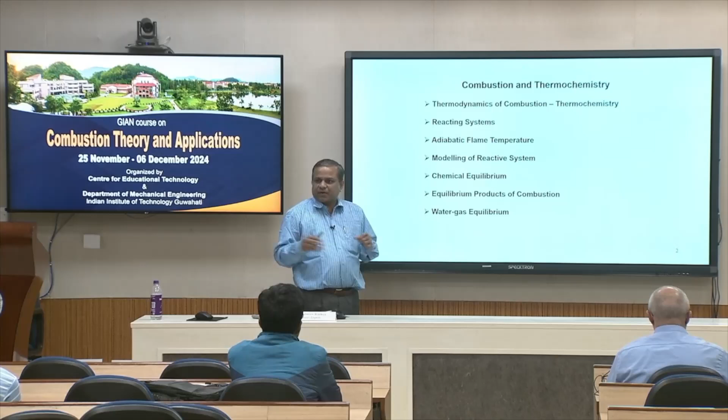Then we will talk about how to model reactive systems. Now, when a reaction happens, it happens in a very short duration, and in this short duration many kinds of elementary reactions take place, but ultimately, when the reaction settles down, we get the products. Under some equilibrium conditions, certain products are formed. Fuel and air, when they get mixed, are supposed to give these products. This situation is called chemical equilibrium. When chemical equilibrium is formed, whatever products finally settle down, we call them equilibrium products of combustion.

There is another concept which we normally use, what is called water gas equilibrium. It has a certain bearing: for any kind of combustion reaction, the final product is CO2 and water. If this happens, then we call this system's concept water gas equilibrium. CO2 and water are in equilibrium after these reactions.

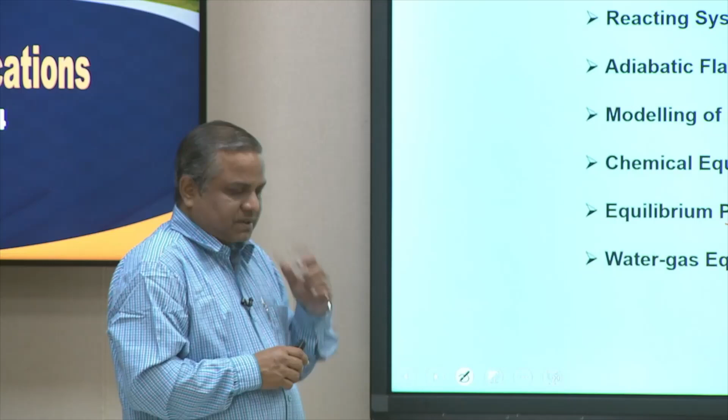Another important aspect of combustion and thermochemistry: the reaction can be exothermic or endothermic. Exothermic means heat is released, endothermic means heat is absorbed. But in combustion reactions, you always expect the reaction to be exothermic. Very rarely do we talk about endothermic, because sometimes some species are formed at very high temperatures, but due to some reason the temperature drops and those species try to settle down by absorbing some heat within the system. In those cases the system may be considered partially endothermic. Okay. So, those are some of the concepts that we are going to discuss in today's lecture.

So, let me brief about this, that when you bring thermodynamics into combustion, the synonymous word we use is thermochemistry, and combustion is nothing new. It is a very old concept. We can see that the combustion concept was existing since the existence of the sun, because that is the oldest mode of combustion, which was happening billions of years ago and will be happening in future. But still we do not know what is the source of energy.

So, obviously when you say combustion, we have fuel and air. Since we are getting energy from the sun, we can imagine there are plenty of fuels available in the sun, and we are getting that in terms of solar energy. So, what I am trying to say is the concept is nothing new, it was a very old concept.

Combustion came to human civilization when we started burning wood, when people saw fires in the jungles because of a variety of reasons. So, those things were started with, and wood is a solid fuel, and from that starting point combustion spread to a variety of platforms: petroleum fuels, diesel fuels and all. So, with that evolution we can say what the outreach of combustion was, starting from 100 years ago till date.

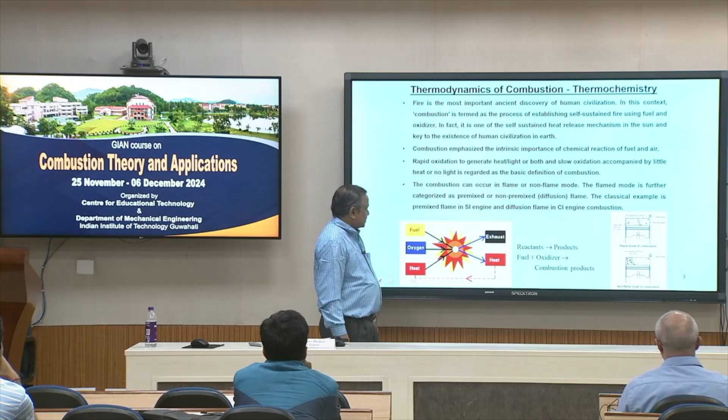So basically, at the atmospheric level, we take advantage of air to get oxygen, and when fuel and air are mixed together with the addition of heat, a tremendous amount of heat gets released after the combustion process is over, and we get some exhaust products. So the identity of fuel and oxygen gets lost. So we say that reactants give products, and these reactants are in the form of fuel and oxidizer. Here the oxidizer is air as a whole, and we get the combustion products.

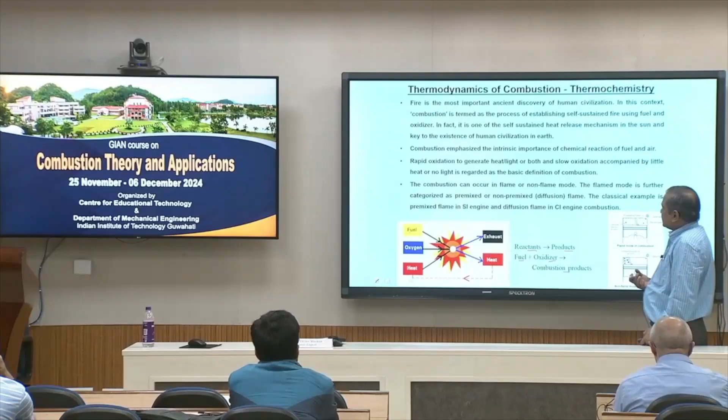Now when you say combustion, what really happens there? How does it initiate? It is initiated through a flame or non-flame mode. Flame mode means that when you create a spark or ignite, as maybe in our last lecture Professor Marcus showed, when you ignite, there is a flame front that starts moving. So that is called a flame. So we introduce a term called a flame, which forms instantaneously when we ignite the fuel and air mixture,

and that flame travels in that domain. So if you take a typical IC engine combustion in an SI engine, it's a flame mode. We initially have an unburnt fuel air mixture here, and we create a spark and the flame gets generated. At the initial level, the entire domain is filled with fuel and air mixture. When you create a spark, a flame front gets generated. That is how we view or model the combustion phenomenon. This flame front tries to move, and when it moves by its own strength, it compresses the unburnt fuel and air mixture, and through this compression all subsequent fuel gets ignited.

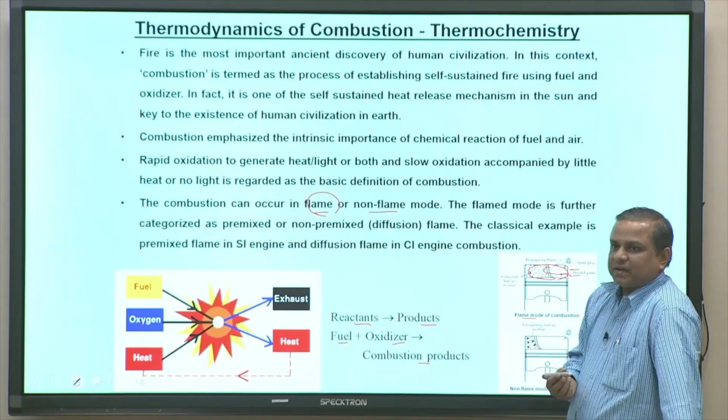Now initially it's a flame, and when the intensity of this flame gets increased and increased, we can characterize it as a flame front traveling at subsonic or supersonic speed. That way we can quantify it as a detonation wave generated through this combustion. But initially the starting point of viewing combustion initiation is through flame. Another way is the non-flame mode.

Actually, this flame mode of combustion is typically a concept called pre-mixed. Pre-mixed means air and fuel are mixed before it gets combusted. So sometimes we call this a pre-mixed flame.

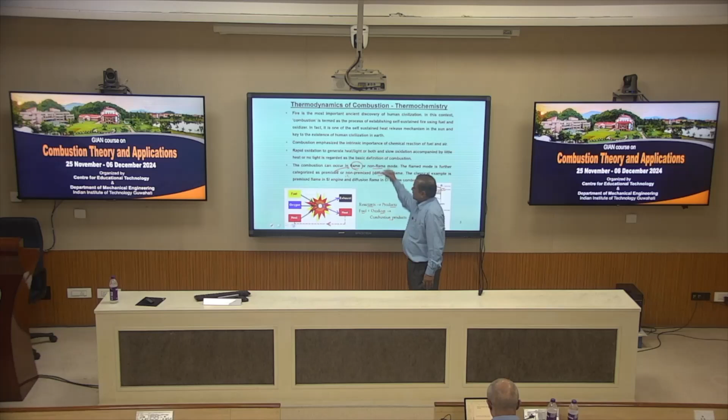The non-flame mode type of combustion and diffusion flame are actually linked in a different way. Many people call it a diffusion flame; some people also call it a non-premixed flame. The concept here is that in a non-premixed flame, the spark plug is replaced with a fuel injector.

When you have this fuel injector, it means that in this piston cylinder device, initially the air is only compressed, and into this compressed air we inject the fuel. So the fuel sees an enhanced pressure and temperature environment, and thereby the fuel gets auto-ignited.

When we say auto-ignited, it does not necessarily have a particular location. In flame mode, the flame front gets initiated wherever you put a spark, and it starts moving. But here, as you might have seen for diesel engines, fuel injectors can be put at various locations. Essentially, we are creating multiple flames at a time, and they settle down together. So it cannot be categorized specifically as flame mode combustion.

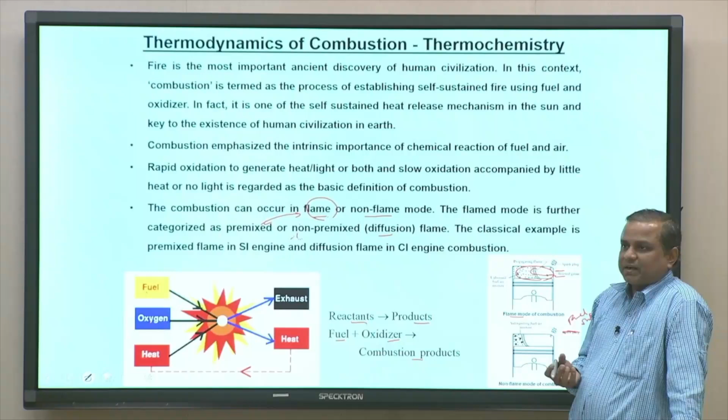That's the reason we call this non-flame mode combustion, because flames can be formed at many locations simultaneously, because the fuel gets auto-ignited. The injected fuel droplets get auto-ignited when they find a suitable ratio of fuel and air, which we call the equivalence ratio. When those numbers are at par, the fuel gets auto-ignited. So this is sometimes called a non-premixed flame.

In many cases it is also interpreted as a diffusion flame, because initially it is a non-premixed flame, and this non-premixed flame also ignites the subsequent layers of fuel-air mixture. So the flame front cannot be seen as a single front; that is the reason the fuel-air mixture gets diffused among themselves.

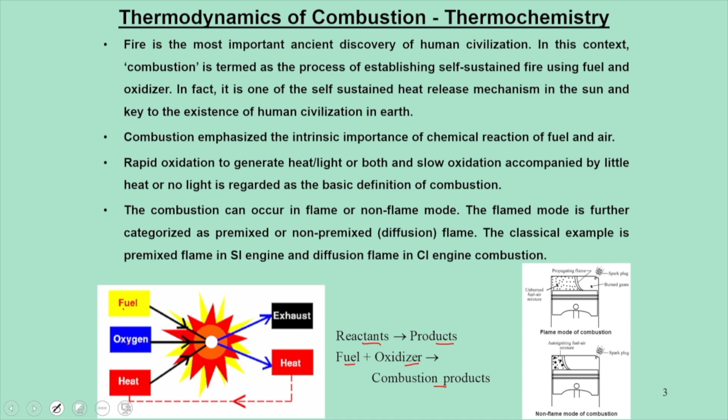The system as a whole has certain internal energy, but during combustion, this internal energy is associated with three major factors. One is the translational or kinetic energy of the species which are constituents of fuel and air. Then we have vibrational and rotational kinetic energy. So we are breaking the fuel down at the atomic as well as molecular level. That is the reason internal energy is interpreted in this manner.

Another aspect is that when we talk about combustion, we normally refer to hydrocarbons, fossil fuel based combustion, which involves chemical reactions, dissociation, and their thermal analysis. Now moving further, with respect to thermochemistry, we are also going to get acquainted with some terms: reactants, products and stoichiometric coefficients. I mentioned earlier that the reactants give products.

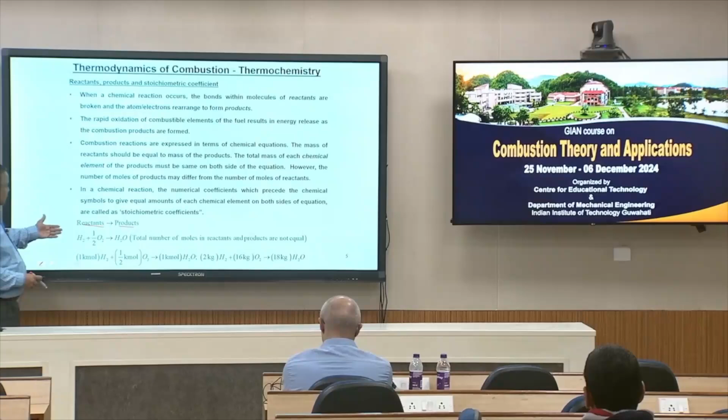To introduce stoichiometric combustion, when you write balanced chemical equations, we introduce terms like, in this case, H2 plus half O2 gives H2O. The number of atoms on the left hand side and right hand side match, but the total number of moles of reactants and products here are not equal, because here it is 1 mole, here half mole, and here 1 mole. So although the number of atoms is the same,

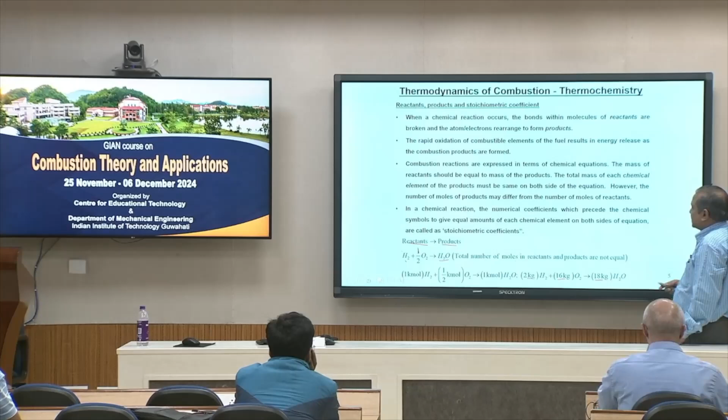when you talk in terms of moles, we write this equation in terms of their molecular weight. So 2 kg of hydrogen and 16 kg of oxygen will give 18 kg of water. Here the masses get balanced, and these masses are typically represented in terms of moles. So mole is the term we look at in a combustion reaction. Additionally, we have to introduce stoichiometric coefficients for a balanced chemical equation.

Then we will move to some concepts of fuel. Fuels are typically fossil fuels, and they mainly contain carbon, hydrogen and sulfur, and mostly the carbon constituent in the fuel is the major source of heat generation.

During what we call a complete reaction, carbon reacts completely with air to form carbon dioxide, hydrogen gives water, and sulfur gives sulfur dioxide. Now, why are these constituents formed?

Because when the reaction is done, after the reaction is over, the temperature always shoots up. When it shoots up, the carbon is no longer in a position to remain as its original identity. It tries to combine with oxygen to form carbon dioxide. Hydrogen has to mix with oxygen to give water, and sulfur will have to give sulfur dioxide.

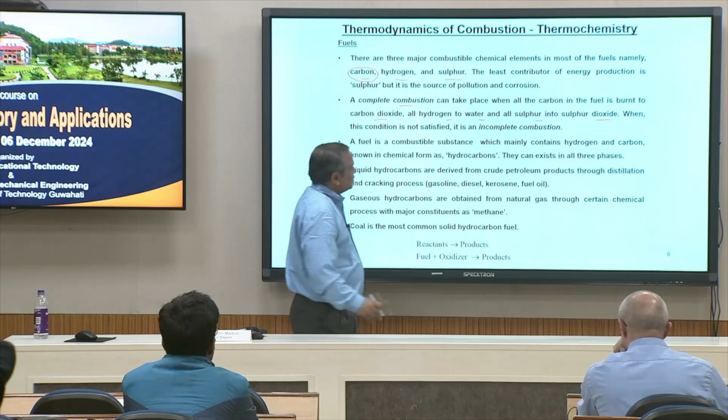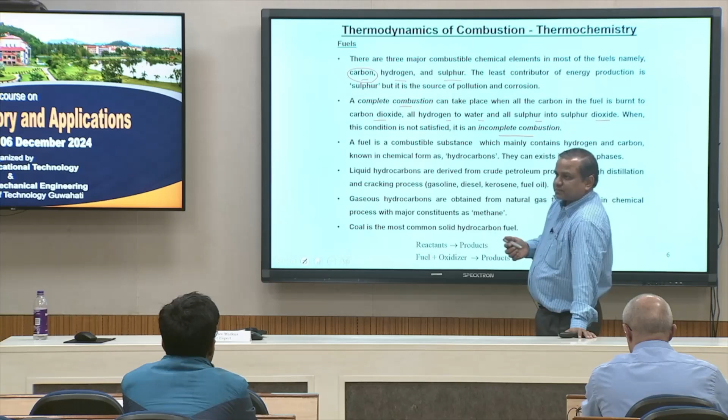But at the end of the day, if you don't get this, then we call this an incomplete combustion. The main culprits for this are: if you do not get carbon dioxide, if you do not get water, and if you do not get sulfur dioxide from sulfur. So when we don't have carbon dioxide, it will remain as CO. Why will it be there? Because the reaction environment is not convenient or ambient enough to form carbon dioxide.

So this is how we should feel the reaction should go about. Coming back to fuel, I mentioned earlier it consists of hydrocarbons, and we can call them solid fuel, liquid fuel, and gaseous fuel.

Solid fuels, we started with wood, but it can also go further—if you are going to concentrate the energy within a small density environment, then you have to bring it into solid form. Firecrackers are in solid form. All kinds of solid propellants are also solid fuels.

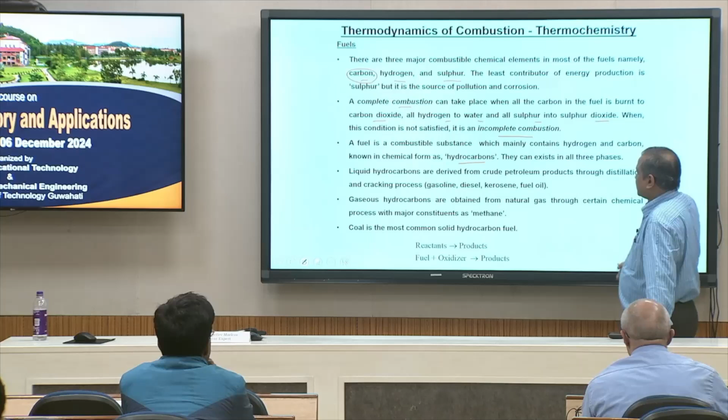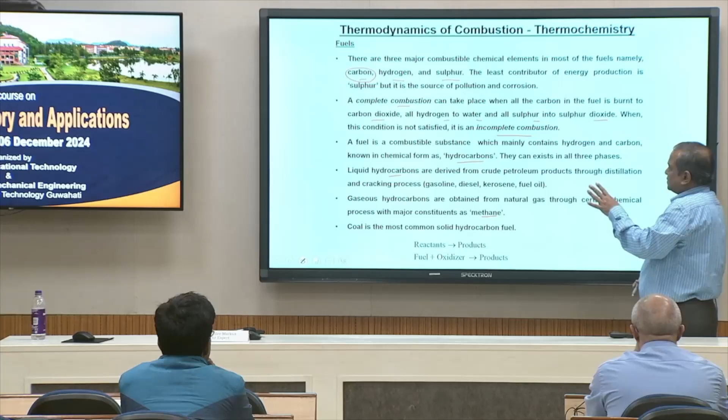For liquids, we have gasoline, diesel, kerosene, fuel oil—all these fall under liquid fuels, and we call them liquid hydrocarbons. Again, when we say gaseous hydrocarbons, the major constituent we find is methane. So what I am trying to say is that it is essentially hydrocarbons which are available in different phases.

So initially, when you look at fuel and oxidizer systems, if you take methane as fuel and it reacts with oxygen, it gives CO2 and water. But since in actual reactions we are getting oxygen from air, instead of writing that equation simply, we write it as O2 plus 3.76 N2. Why does that number come? Because of this ratio.

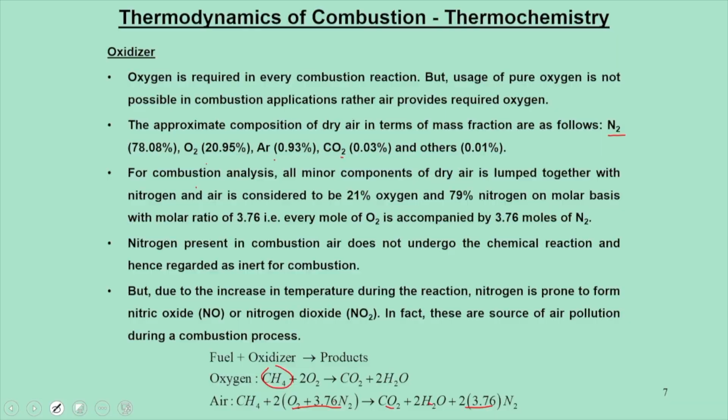So ideally speaking, they should give CO2, water, and nitrogen should not react—nitrogen comes out as it is. This is how the complete combustion reaction should look like. But in reality, this normally doesn't happen.

This is possible only when this equation is balanced, and for this balanced equation we use stoichiometric coefficients. But if the reaction doesn't happen in this manner, which means the composition or the stoichiometric coefficients of fuel and air do not match, then we will end up having different components.

We may not form CO2, we may not form water—then what else will form? In those cases, we end up forming NO, NO2, because the N2, which has to go out as is, due to the elevated temperature tries to recombine with oxygen to form these kinds of constituents, and they are actually the culprits for air pollution.

There is some logic here: when you use the concept of IC engines, the frequent term is air-fuel ratio. But when you enter gas turbine combustion, people use fuel-air ratio. The interpretation for both is the same, but there's a typical requirement for gas turbine combustion, because those fuels are very costly.

When fuels are very costly, people rightly try to find out, instead of air-fuel, they call it fuel-air, because they want to know the exact quantity of fuel that is getting utilized, or what is the exact quantity of fuel which is not utilized. So in gas turbine combustion the fuel-air ratio becomes frequent, even in rocket combustion as well, though there they use solid fuel.

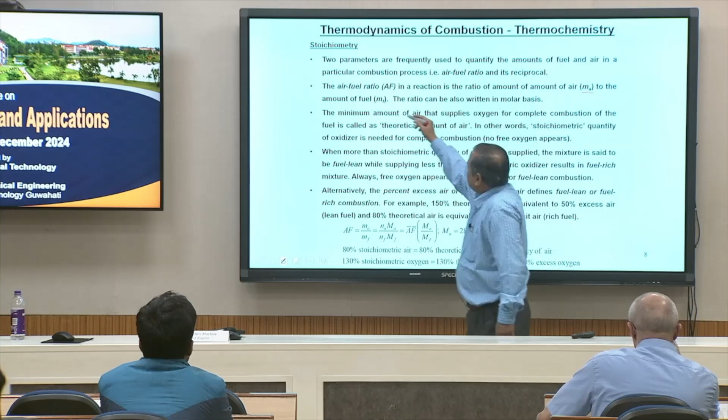So that way, air-fuel ratio and fuel-air ratio terminologies are the same, but interpretations are different. In one case we say air-fuel ratio with respect to mass of air to mass of fuel; in the other case we say fuel-air ratio with respect to fuel to air, mf by ma.

Then there is a term called theoretical amount of air. For a reaction to happen, oxygen plus nitrogen constitute air. To ignite a certain quantity of fuel, we require an exact quantity of air. That air we call theoretical amount of air, and that theoretical amount of air we call stoichiometric quantity.

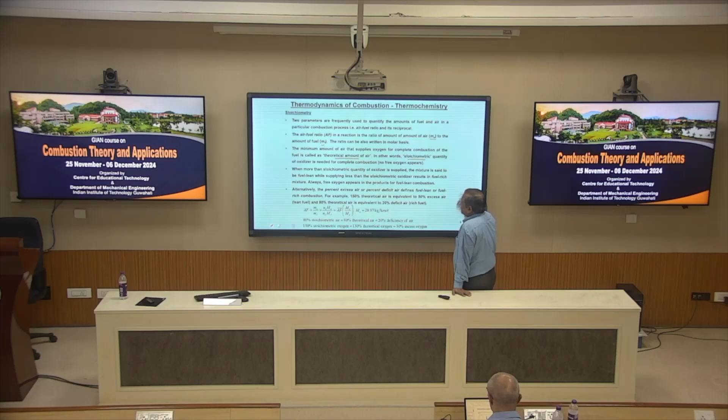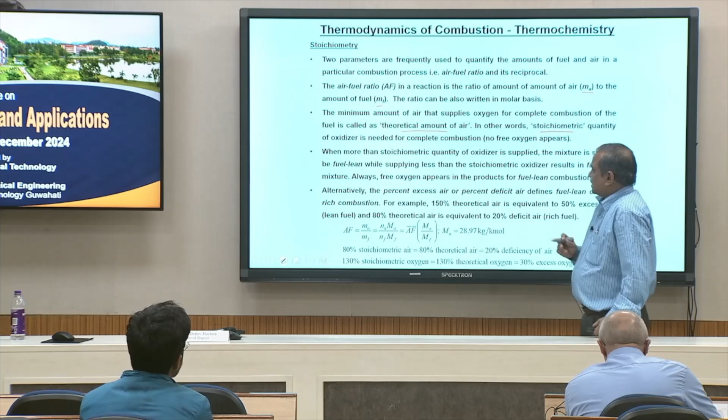Using this stoichiometric air, if your combustion process does not use the exact quantity of theoretical air, then the mixture is treated as either lean or rich. The word lean means, with respect to fuel, that fuel is less and air is more, and vice versa for rich. So fuel lean or fuel rich are the two terminologies we will be using along with this stoichiometric value.

Another way of interpretation is percentage of excess air. If it is theoretical air plus percentage of excess air, it defines fuel lean combustion; percentage of deficit air defines fuel rich combustion. For example, 150% theoretical air is equivalent to 50% excess air, which is lean fuel; 80% of theoretical air is equivalent to 20% deficit air, which is fuel rich.

All this air fuel ratio or fuel air ratio we write mathematically. Let us say air fuel ratio is Ma by Mf, and this Ma we can bring to molecular weight and number of moles. Then we find the number Na by Nf, which by definition we call the molar air fuel ratio. So that way we normally interpret our analysis, either in mole form or mass form.

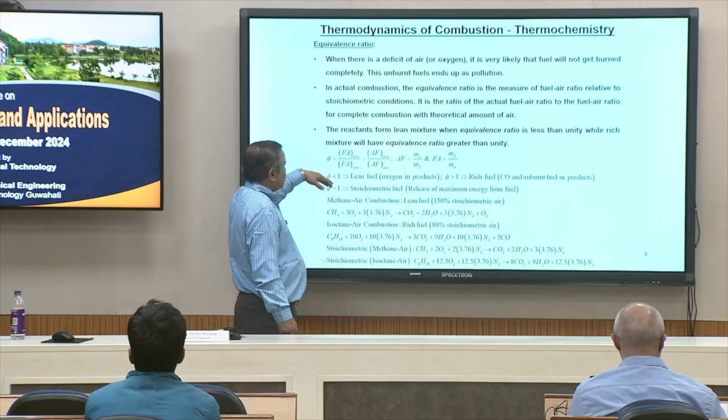When the reactants are either lean or rich, we define a term called equivalence ratio phi, based on the ratio of the actual fuel air ratio to the stoichiometric value. In reality it can be fuel lean or fuel rich, but the actual stoichiometric case is based on getting the exact quantity of theoretical air. So if it is fuel lean, phi is less than 1; when stoichiometric, phi equals 1; and phi is greater than 1 when it is fuel rich.

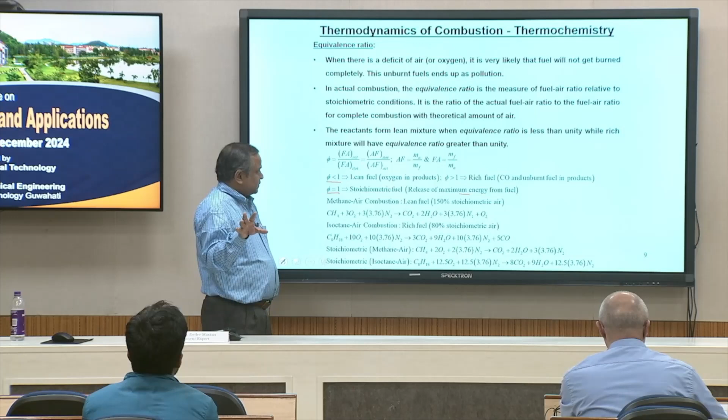The summary is that with fuel lean conditions we get oxygen in the products. With fuel rich conditions we get CO and unburnt carbon or unburnt fuel in the products. And when you have stoichiometric conditions, we get the maximum energy, which relates to finding the adiabatic flame temperature during combustion. These are some class examples of methane air combustion for rich and lean fuel.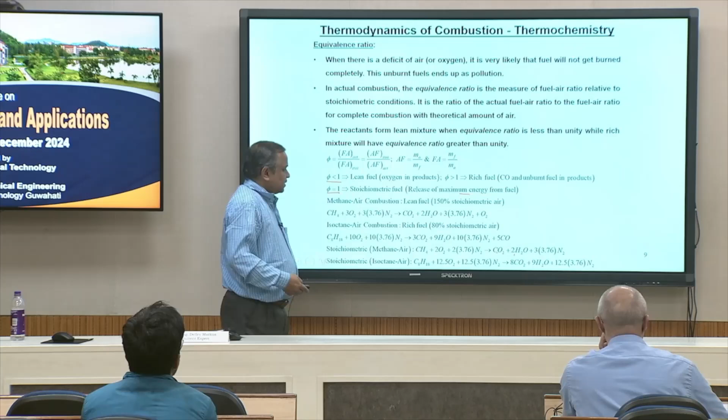Then we have these products of combustion. For a methane air combustion, we get CO2 and water, and N2 remains as it is. What we see is that in the products of combustion we get water, and when we say it is water, the analysis or interpretation is a little different.

One approach is to take the products of combustion as a whole with CO2 and N2 without considering water; that is also a possibility. The other way is that you take the water into account. So those cases we call dry product analysis or wet product analysis.

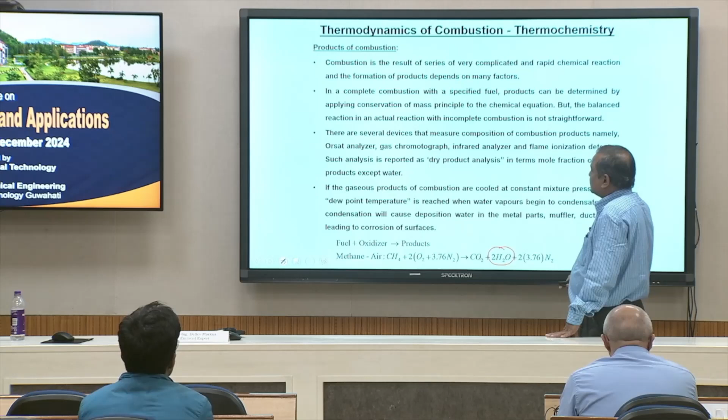In some situations, the gaseous products of combustion in the mixture are cooled to a dew point temperature. This happens because when the products of combustion find a cooling environment, they try to condense with deposition of water. Then we say they reach their dew point temperature, so condensation gets initiated.

We will try to give the introduction to the standard reference conditions used when dealing with combustion mechanisms. The standard reference state uses either reference condition of atmospheric pressure and reference temperature normally set at this number. Why is this required?

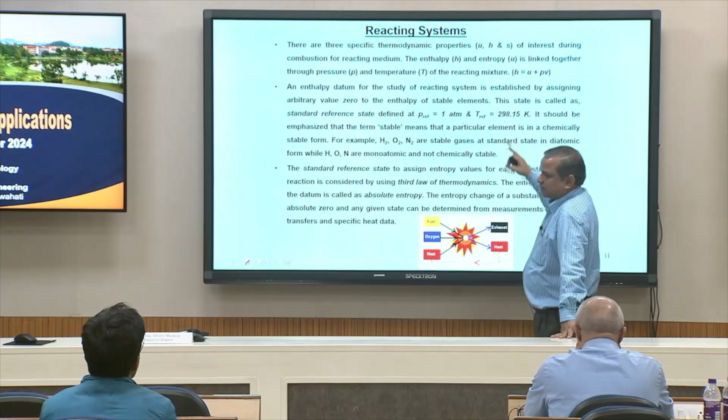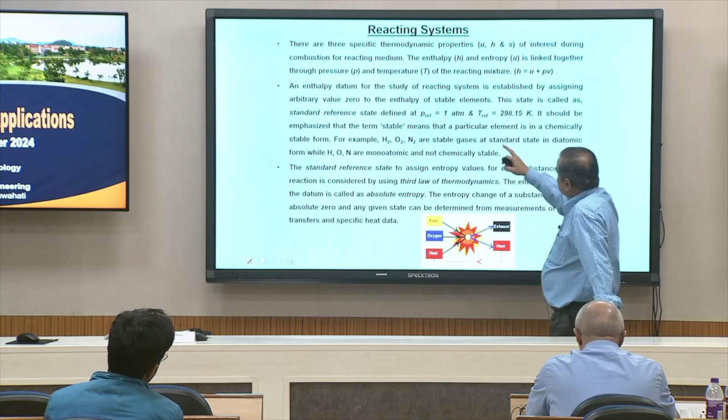Because in our thermodynamic analysis calculations, we require the formation of the products with respect to some references. Those formations of products are taken at these references, and all the data available in the books are with respect to the standard reference state, mainly required for computation of absolute entropy.

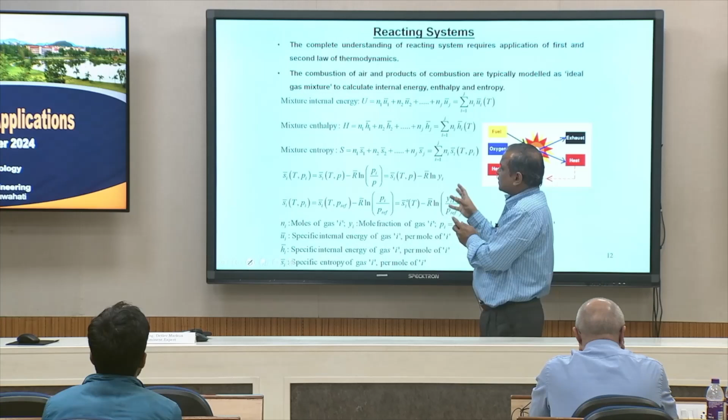So here are these equations I showed in the last class, where we try to define a mixture, and here we are saying that a mixture is not a mixture, it is reactants and products. Those reactants and products we quantify with their parameters: internal energy, enthalpy, entropy for each constituent, to make a balanced equation.

So what we see here is that while computing entropy and all these equations, we use molar form, number of moles for each of the species or constituents. When some species is formed, how it is formed has to be dealt with, because when you do the entropy calculation, it talks about the difference between initial state and final state.

Now the initial state and final state, when you analyze for a mixture, it is easy because they do not react. Now when the reaction happens, the identity of reactants is lost. So people try to interpret how to find out this change in entropy.

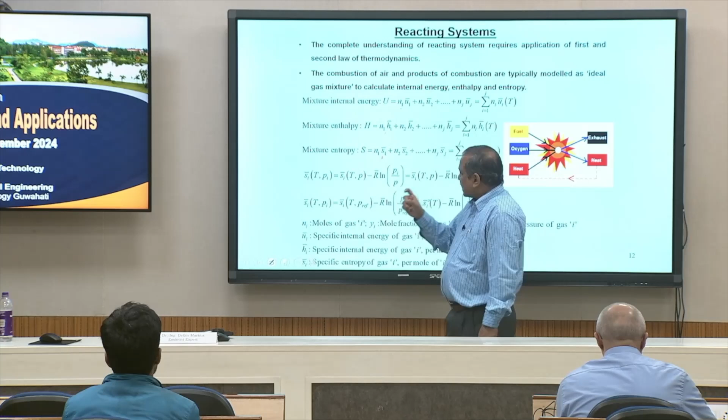So they started with the concept that we have to take some reference value, P reference and T reference, as that reference condition. You take that reference value as identity for calculation of entropy, and from there you calculate the entropy change. So the analysis gets simplified, because if you look at classical thermodynamic equations, delta S is equal to S2 minus S1, this is entropy.

You do not really bother about this term, we really bother about this R bar ln Pi by P reference. But here we have to bring absolute entropy into discussion.

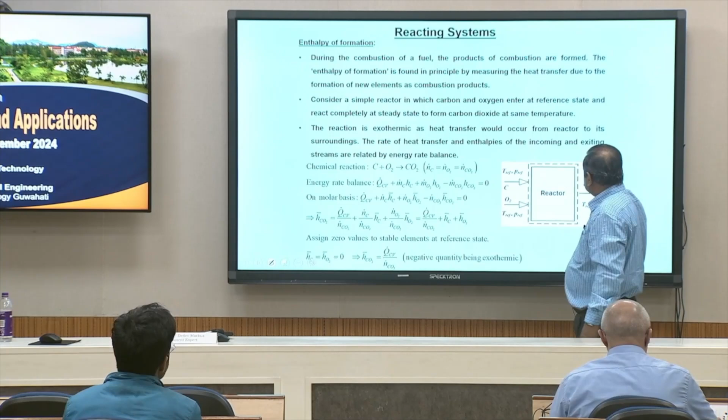This is enthalpy of formation. So another term: how do you get the enthalpy of formation? While defining this term, we are actually using the first law analysis for reactants and products. So something like here we say we have a reactor and some species that enter, and while going out we get different things, but the entire reaction takes place at these reference conditions.

This means that if you say formation of C at this reference and formation of CO2 at this reference, those reference conditions match between your inlet condition and outlet conditions. When they match, we frame, first we find out the chemical reactions, do their molar analysis, and then find out the difference between the enthalpy of formation, defined by this term H bar CO2 through these equations.

So ultimately for any reaction, enthalpy of formation of CO2, in this case, is nothing but heat transfer divided by number of moles, which means this heat transfer can be negative or positive depending on exothermic or endothermic reaction. That way we say it is the enthalpy of formation for that species.

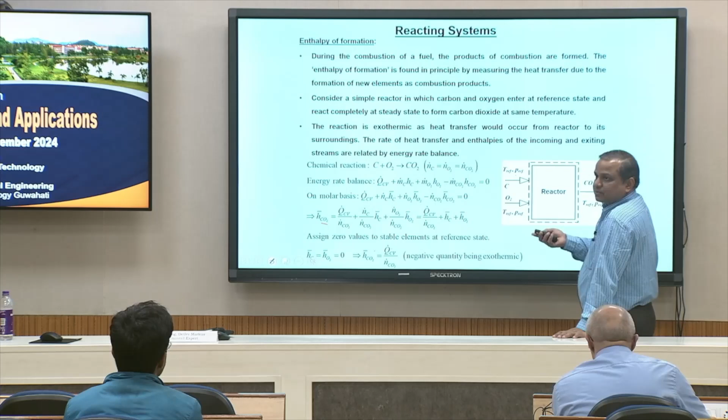We say NO2 is formed, CO2 is formed with respect to C and O2. Then with respect to those enthalpies of formation, because the word enthalpy of formation is with respect to species, but as a whole, when you take the fuel as a whole, we interpret it this way: we first think about what is the enthalpy of combustion.

So enthalpy of formation is with respect to the species which is formed. Enthalpy of combustion is with respect to reactants and products. When you say reactants and products, using the first law, you try to find out what is the energy content in the reactants and what is the energy content in the products. The difference between them gives the enthalpy of combustion.

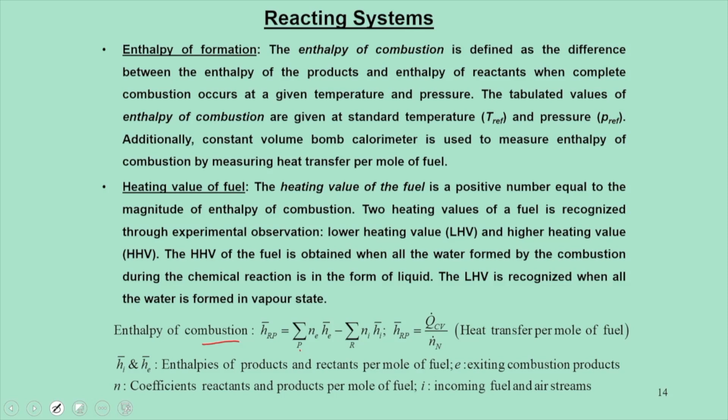This enthalpy of combustion is linked to the heating value of fuel. How do you interpret this? Enthalpy of combustion is with respect to chemistry, but with respect to fuel we call it the heating value. The heating value of the fuel is interpreted in two ways: one is the higher heating value, the other is the lower heating value.

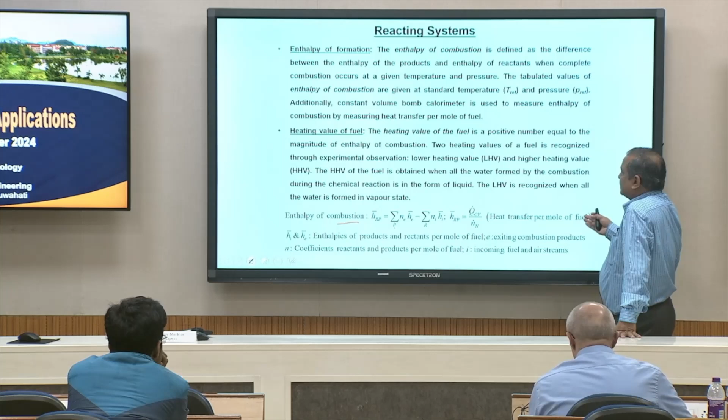Now, when the analysis is done keeping water in the combustion products, in one case we call this a higher heating value. When you say higher heating value, it is obtained when all water formed by the combustion products is in the liquid form. So, that way the consideration of water formation is taken into account during the combustion process. Now, when we say lower heating value, it is recognized when all water formed is in the vapor state.

So, that means in one case we say the formation of products without formation of water, and in the other case we say the formation of products when water is formed or condensation takes place. That means the products are cooled below their dew point temperature.

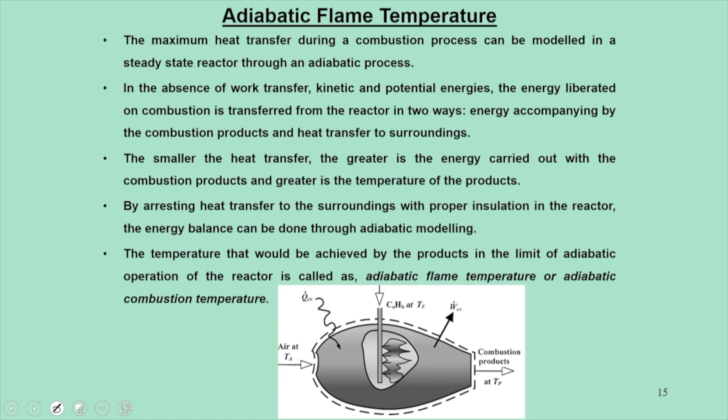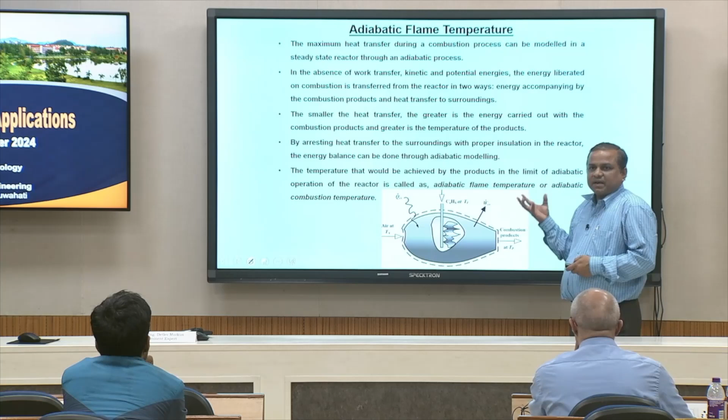Then I mentioned earlier that when reaction happens with some fuel and air, if you enclose that complete environment, then we get a case where the entire energy gets contained within that domain. Now, when that energy gets contained in the domain, the maximum possible temperature that can be raised through this process we call the adiabatic flame temperature. The word adiabatic is just a concept to calculate the maximum temperature during a combustion process. Using our governing equations, one can calculate the adiabatic flame temperature.

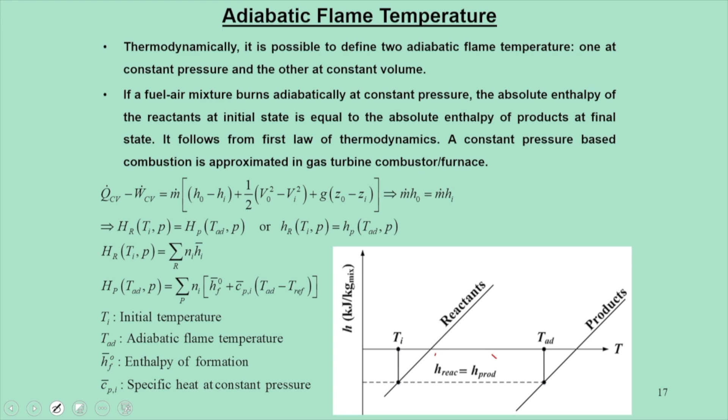Now, while calculating the adiabatic flame temperature, we interpret graphically in this manner, that the entire energy of reactants gets transferred to products. So, when you plot the enthalpy versus temperature curve for all reactants and all products, they go in this manner. Initially the reaction starts here at one point. Slowly, when the reaction happens, the number of moles of reactants comes down, and products formation goes up.

So, the temperature on this axis keeps rising, and at one particular time the reactants are completely burnt to form the products, and we do not allow that heat to go out of that domain or reactor. So, those enthalpies are balanced. In those cases, whatever temperature we reach is called the adiabatic flame temperature. Initially we start with Ti and finally we arrive at this point, the maximum temperature. We analyze the adiabatic flame temperature in two ways: one at constant pressure, the other at constant volume.

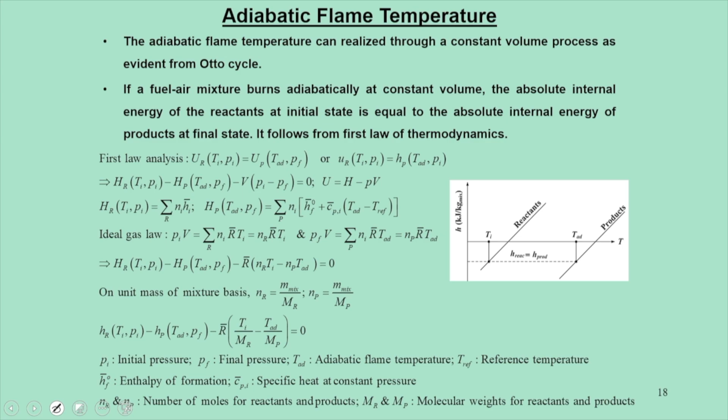I mentioned our thermodynamic equation from the first law. If the first law is to be satisfied, we can say reactants and products are equal, because the internal energy is a function of temperature. So, from the first law we start with internal energy for reactants and say that they match. While calculating that internal energy, initially they are at initial Pi and Ti, and when final products are formed, they are at the adiabatic flame temperature and final pressure. When this equation matches, we can calculate these two values, one at constant volume, the other at constant pressure.

Okay, and this internal energy can be represented in terms of enthalpy as well, because U is equal to H minus PV. So, interpreting adiabatic flame temperature can happen in two ways, one at constant volume, the other at constant pressure. Based on this, we have two equations. One equation is this, in terms of enthalpy, where the adiabatic flame temperature is calculated at constant pressure.

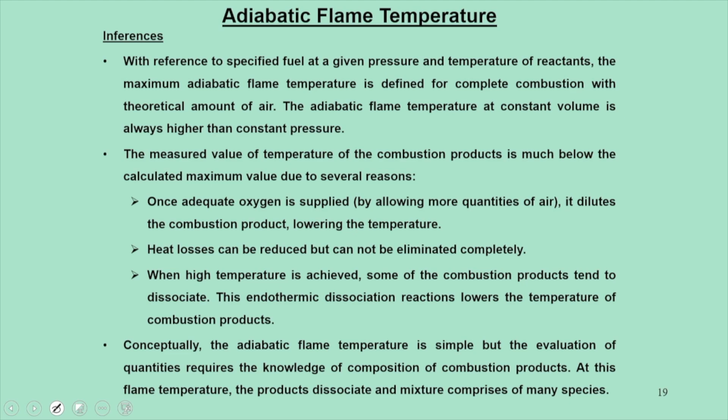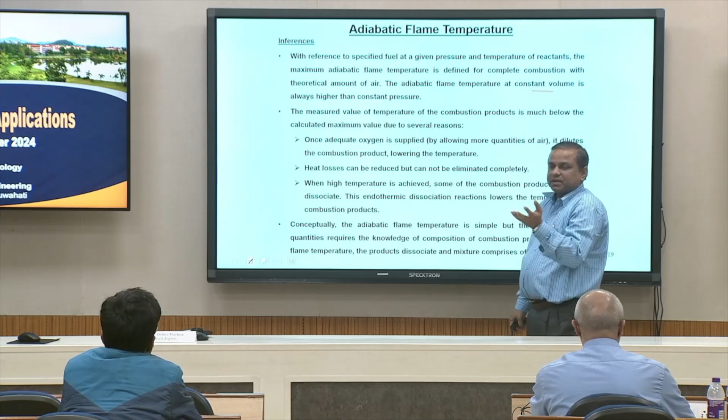Now, having said this, from adiabatic flame temperature calculation at constant pressure and constant volume, one can find some important inferences. During a combustion process, the adiabatic flame temperature gives the maximum possible temperature, and if you calculate it at constant volume, it is always higher than at constant pressure. This has similar logic to the analysis of the Otto cycle and diesel cycle in IC engines: one is constant volume combustion, the other is constant pressure combustion. So, these are some of the inferences we get.

Then there is a concept of absolute entropy. This part I have already explained, how you get it for a mixture by considering the reference point of pressure and temperature.

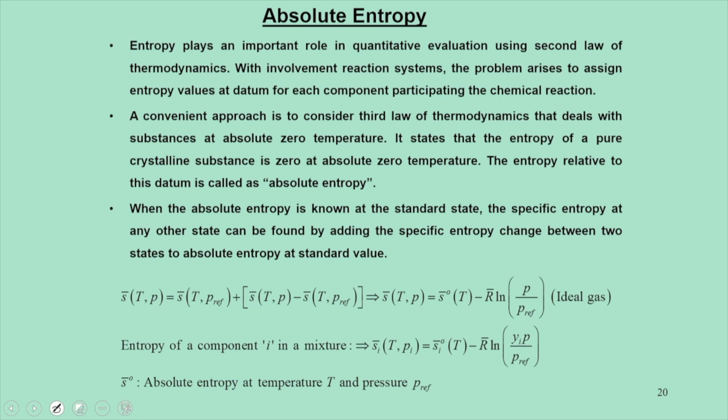Now, coming back to modeling of reacting systems, there are two approaches. One is a control volume modeling, other is a constant pressure modeling. So, in this control volume modeling, we take care about main chemical reactions, how it happens, and this is a simple generic form of chemical reactions for hydrocarbons, where we say these subscripts of carbon and hydrogen in a general form A and B, and through this equation, putting A and B in some manner, we can frame real combustion equations.

So, while doing this, one can think of a control volume based modeling, which allows heat transfer into the systems, because through this process we are igniting. Other way is that fuel and air enter a reacting domain. At the end of the day, we have some fuel sitting in here, air enters, when the heat is added we get the combustion products. So, this approach is a control volume based modeling.

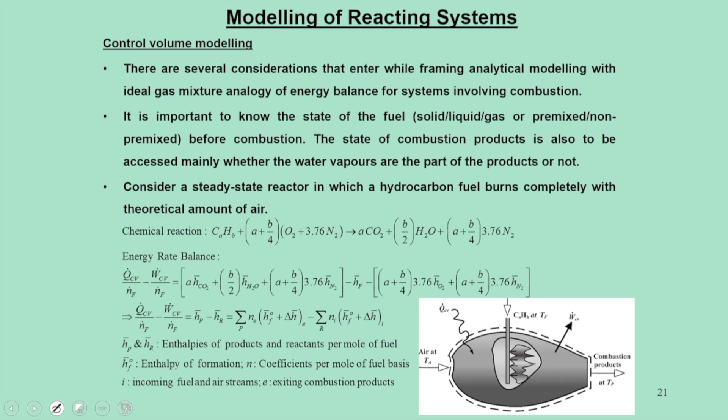And in a closed system modeling, normally we start with this kind of constant volume based modeling. For a closed system, we get our analysis through this constant volume modeling by using the advantage of interpreting internal energy in terms of enthalpy. So, we start with this equation, but somewhere this U value is interpreted as H minus PV. PV is nothing but your RT. These are the equations which are available in the books as well as in the slides. One can interpret in this manner.

Then we have to deal with the entropy balance again for open systems, and subsequently it can be interpreted for the closed system as well. And why I am trying to link is that all these equations which were given in our last lecture were used to derive this form, and here we are not going into the derivations, rather the end use of these equations can be directly interpreted for modeling of any kind of combustion system.

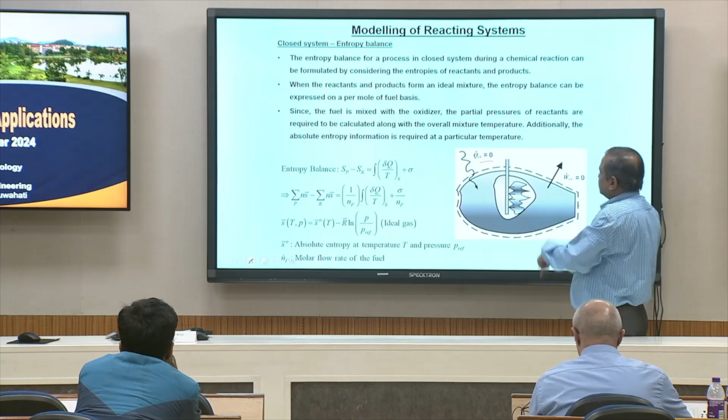Moving further, it is a closed system entropy balance. So, for that we need to recall the entropy equations from thermodynamics, assuming that the reaction is going to happen in a closed system with Q, no heat additions. Okay. So, we have to do this analysis in that manner.

And coming back to the chemical equilibrium part, when the reaction happens, when you have an ideal combustion, we have CO2, water, O2 and N2, but when we do not have those things, we have intermediate products like OH, CO, H, N, NO. These are actually dissociated species, and they try to see another environment to form CO2. If they do not see it, they remain as they are. So, if these are there, that means equilibrium has not happened.

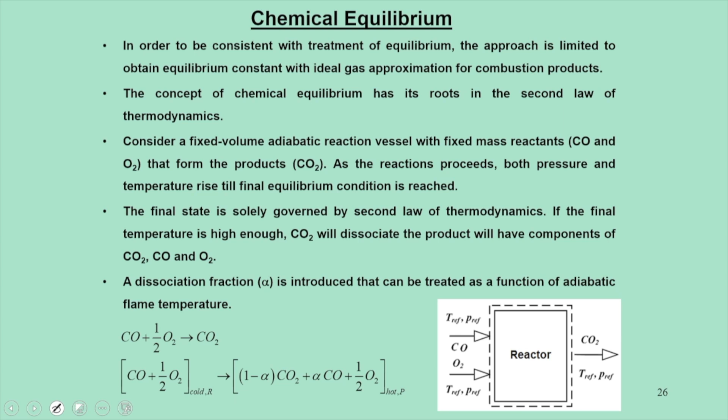Now, moving further, this is a classical example of a chemical equilibrium situation: when you actually view a reaction between CO and O2, it has to give CO2. But the formation of this CO2, what actually initiated this reaction? So, initially we write this equation in this manner, with the case that CO and O2 do not come together all of a sudden. So, when you see this equation, it is an equilibrium equation.

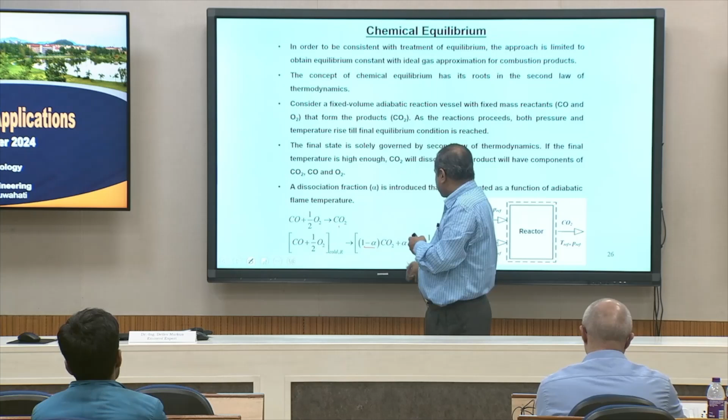Had this equation been non-equilibrium, at any given instantaneous time, we introduce a term: 1 minus alpha, alpha, and so on. So, when alpha is 0, there is no formation of CO. So, this is how you introduce these equations separately in the modeling for this analysis, and that alpha we call the dissociation fraction.

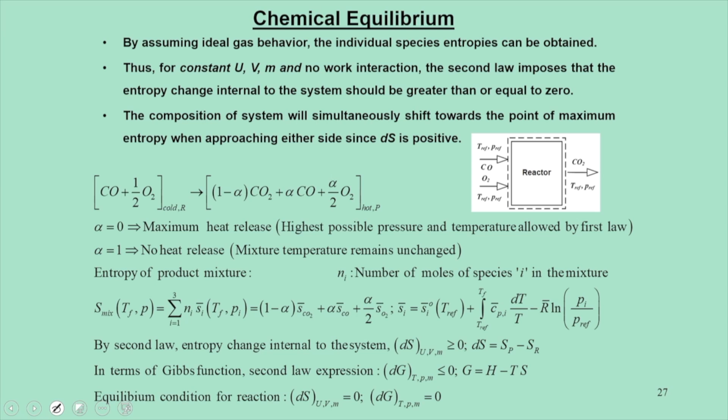This is again the same case: when alpha is 0, it means maximum heat release. When alpha is 1, there is no heat release. There is some significance of interpreting the equation in this manner, because when combustion modeling is done in software or on your own, you have to write the equation in this manner, putting its end conditions.

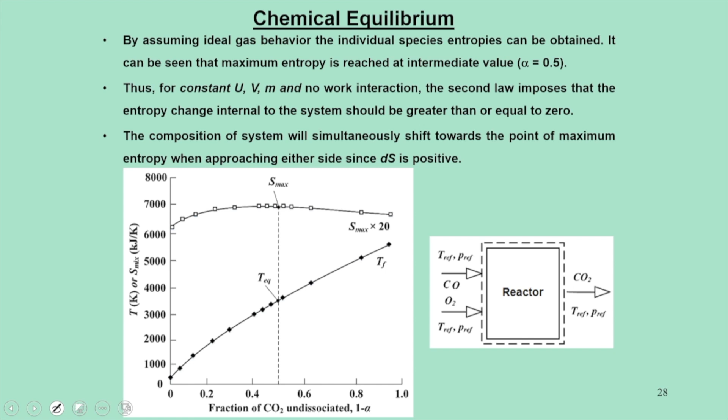Okay, so this is a case where we try to interpret a chemical equilibrium situation for a simple reaction system from CO and O2, which means that when the reaction proceeds, we can see how the fraction of CO2 gets dissociated, that means how this parameter 1 minus alpha changes during a reaction.

Now, when you say it is a chemical equilibrium situation, it means that at that point of time entropy, because entropy drives the reaction, the reaction proceeds in the direction of entropy. Simultaneously, we calculate the temperature as well as entropy.

How do you calculate? I have told you, the reactants and products you have to take as different entities, each term you have to calculate, and for each case you have to do the energy balance through this process, and we can say that entropy always increases in the direction of reaction. So, this curve we get side by side. When the reaction proceeds, temperature also increases because this dissociation fraction gets changed. So, this curve also keeps on increasing.

At what particular time we reach, we have this final temperature, and this final temperature, if the walls are adiabatic, can be interpreted as adiabatic flame temperature. Now coming back, when the equation settles down, that means when equilibrium is achieved, which means that reaction cannot proceed further, you have achieved the equilibrium temperature. So the point at which we have maximum entropy, if you drop a vertical, then it will cut this curve and this will give you the equilibrium temperature.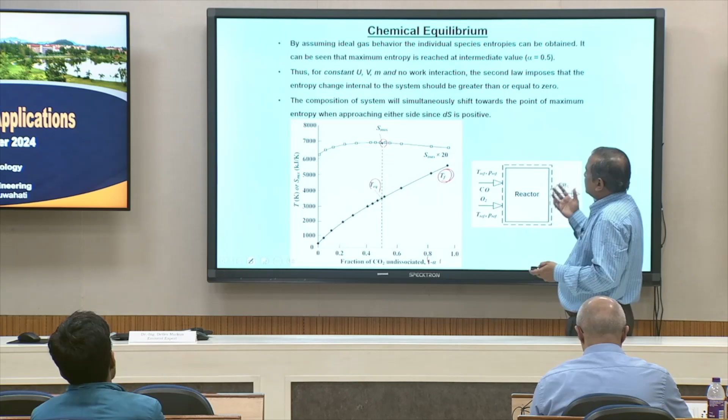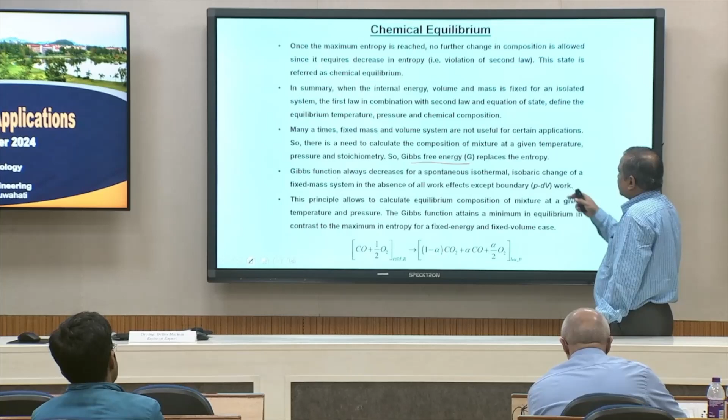So this kind of graphical analysis was mainly used when we don't have any other softwares or modeling approach. So this I have already explained. Additionally, I forgot to mention another term, the Gibbs free energy, or normally we say Gibbs function. The Gibbs function plays a vital role during reactions because entropy is one parameter. Gibbs function gives a different approach which considers temperature and pressure as well simultaneously for the analysis of the combustion process.

So something on this I already told for equilibrium products of combustion. In equilibrium products of combustion, for a propane air mixture, one classical example, the intermediate species are different, like OH, NO, and when you take this mixture globally, when equilibrium is achieved, we get CO2 and water. This is a classical curve that talks about equilibrium products of combustion for a propane air mixture. The significance of the curve is that in a single graphical representation, we can talk about mole fractions, maximum temperature, and the range of equivalence ratio in which the reaction is going to happen.

So if you see here, for a propane air mixture, ideally at equivalence ratio 1, you will reach this adiabatic flame temperature, but in reality that normally doesn't happen. It happens somewhere at phi equal to 1.05. These numbers we get from a realistic experiment, and corresponding to this we get the flame temperature as 2278 Kelvin. So for all IC engine applications, whether you do constant volume analysis or constant pressure analysis, your adiabatic flame temperature falls in this range. When you go to gas turbine combustion, these numbers will be different.

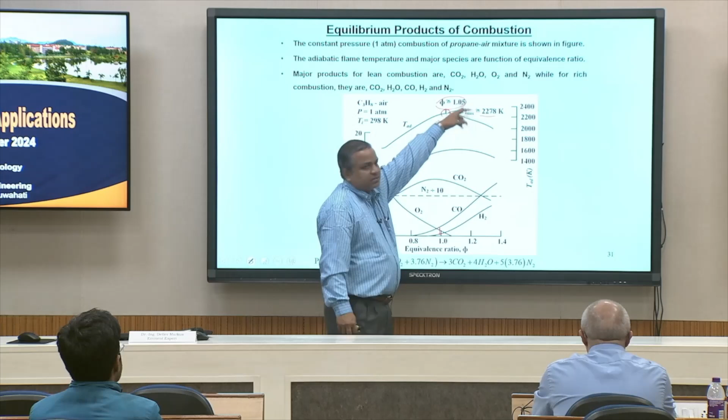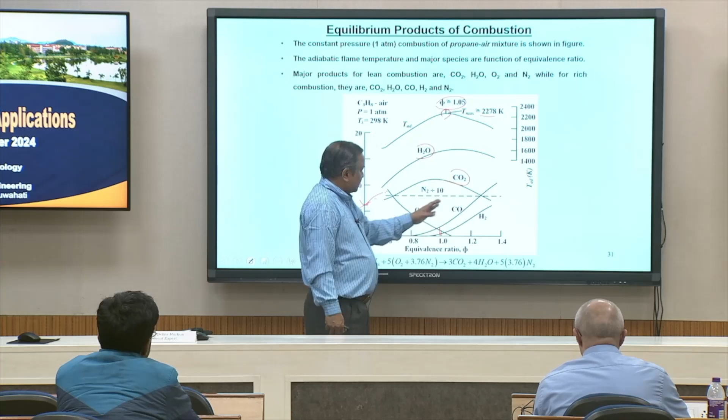Coming back to the formation of the products, when you have equilibrium based combustion, we have CO2 and water. As you see, when your equivalence ratio is increasing, CO2 is also increasing, then it falls down because the concentration or mole fraction falls down, and similarly for these. But this is what you see as a final entity. Before H2O and CO2 form, CO formation would have already started. Hydrogen H2 would have reacted with oxygen. These are some of the intermediate reactions that build up during the initial phase of reaction. Finally, it settles down. But what we see globally is this curve as a chemical equilibrium equation.

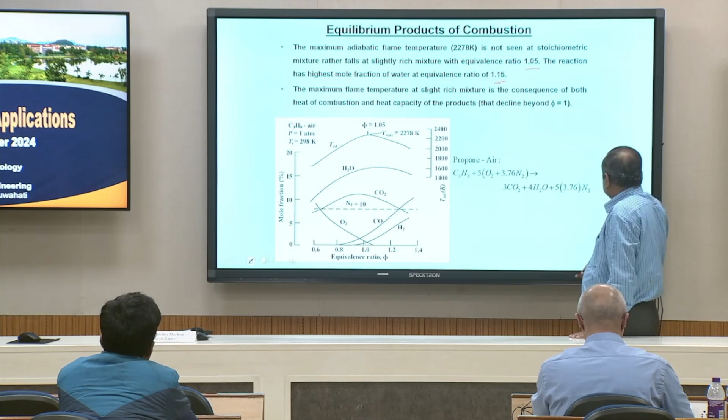This is a similar curve. Here also I mentioned adiabatic flame temperature, and one point is that 1.05 gives you the maximum temperature, but the highest mole fraction of water occurs at equivalence ratio of 1.15, which means that at equivalence ratio of 1.15, it is expected that we can get maximum mole fraction of water. These are in continuation with that. There is nothing new, I have already explained.

And finally, products of combustion: this is a complete picture that talks about all intermediate species that are formed during the lean phase and rich phase. This curve shows how intermediate species like OH, NO, H, CO started at this point, and when the reaction proceeds, NO formation starts, and simultaneously OH and CO formation would have started. So all the curves are plotted together, which means this particular graphical representation talks about species evolution during combustion reactions.

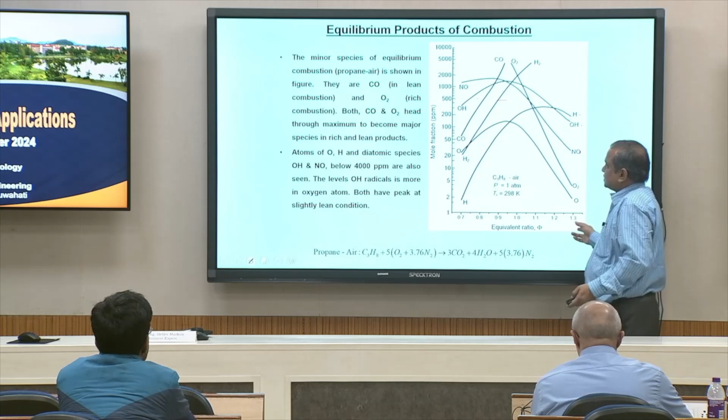So this is nothing new here. And finally, lastly, I will just talk about a water gas equilibrium case. Normally when you have end products of CO, which is completely undesirable, many industries talk about how to reduce this CO level. They consider water-gas shift reactions, like they create an environment in the final product domain so that when there is a formation of CO and it sees enough water, it proceeds to formation of CO2.

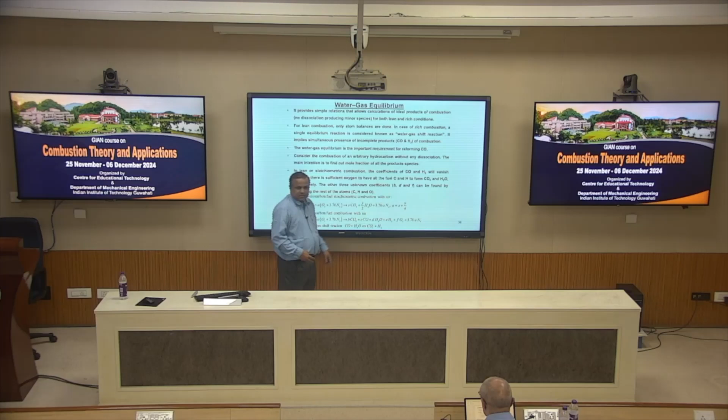So they create a typical environment at the product level, so that we can shift the propagation of CO to CO2. So this is what we call water-gas shift reactions, and most industries use this concept to reduce the level of CO, which is mainly the culprit for pollution.

So already it is time, maybe we can continue after this, or I will continue in the second half from there, because I have some more slides to show. Or maybe a few minutes if it is there. So, last point I am coming back.

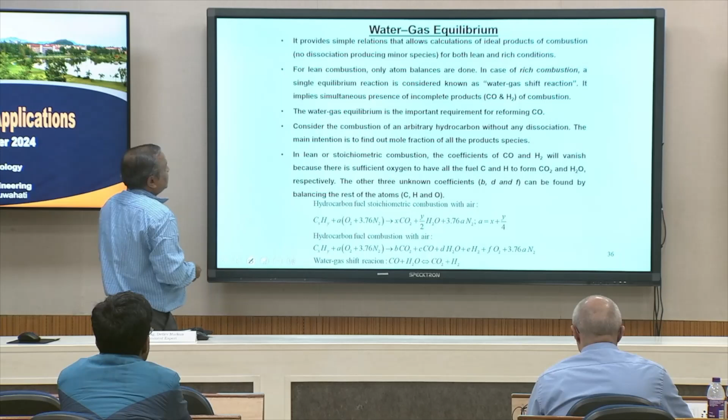I mentioned these water shift reactions. While dealing with water shift reactions, another important concept is that we find the equilibrium constant, because when you analyze the hydrocarbon equations, with fuel and air taken with respect to oxygen and nitrogen, we arrive at these particular equations when such a reaction happens in a situation that

we have formation of CO, oxygen, H2, H2O, CO2, which means these equations are modeled as if a reaction happens in a generic manner, and all the products are trying to form simultaneously. Then how do you evaluate those stoichiometric coefficient values? For that reason, we introduce a term Kp, which is called the equilibrium constant. This equilibrium constant we normally find with respect to ratios of various species that are formed.

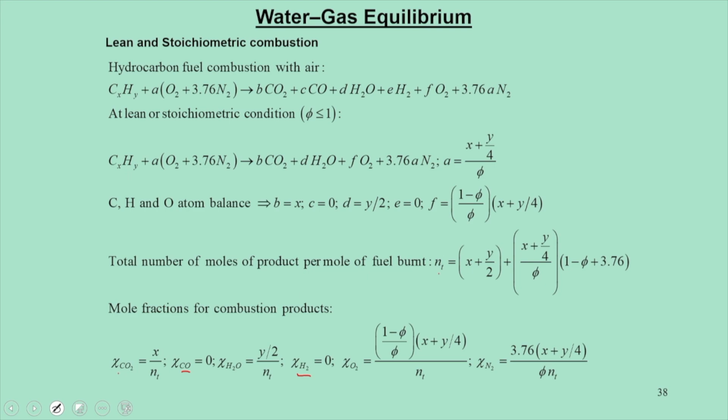As I explained, when the reaction is lean or stoichiometric, we have these products, CO2 and H2O. But when you have rich combustion, the fuel is not getting sufficient air to combust properly. In those cases the reactions have to be modeled in a similar manner. By balancing C, H and O atoms, we get the number of equations equal to the number of unknowns, through the introduction of the equilibrium constant Kp, which is evaluated based on the partial pressures of each constituent.

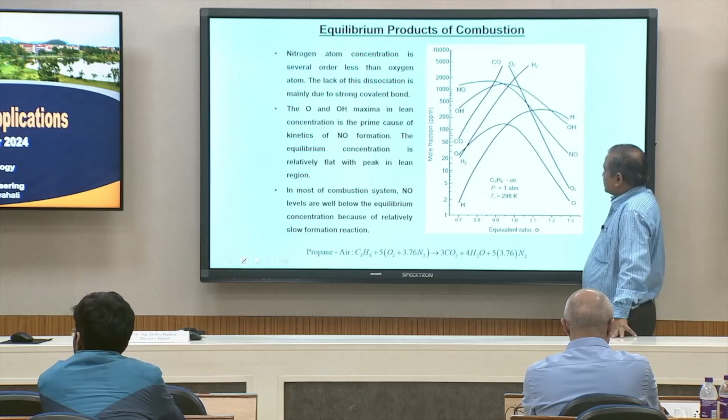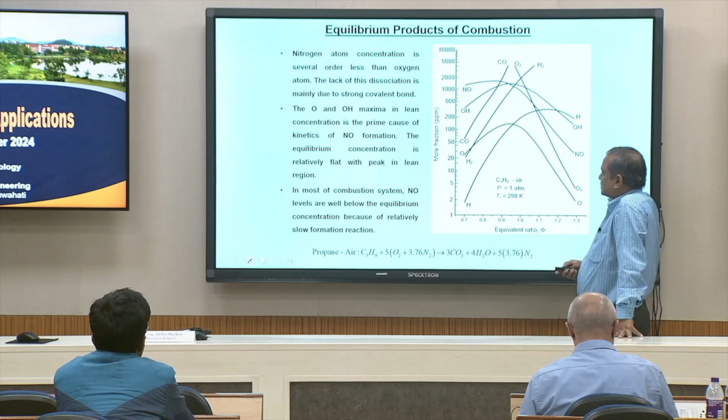So thereby we get a set of equations, and through that set of equations we get this kind of curves. What I am trying to say is that when you generate these curves, in the background we are using all these equations, which give you a graphical representation of the variety of species formed during the evolution of a chemical reaction. So this is all I am trying to say in this lecture.

There are some sample problems in this lecture that can be used to understand what has been covered. At the end, I will just emphasize: although you see these equations, unless you try them on your own, you will not get a feel for it. For example, if you want to calculate the adiabatic flame temperature, unless you really do the actual calculations, you will not be able to evaluate these numbers.

This specific case talks about when you really use the enthalpy of reactants and products, map them with the data tables from the book, and calculate the adiabatic flame temperature in two situations, constant pressure and constant volume. We will find that the constant volume value will be greater than the constant pressure. So I am trying to emphasize, only if you do it will you get a feel for this interesting approach. So with this I will conclude.